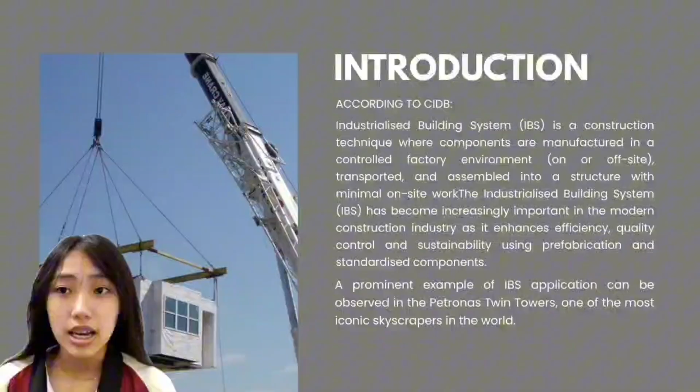Good morning. Our group today will present the usage of IBS technology in the construction of the Petronas Twin Towers. Industrialized building system is a construction technique where components are manufactured in a controlled factory environment. Then, they are transported and assembled into structures on site.

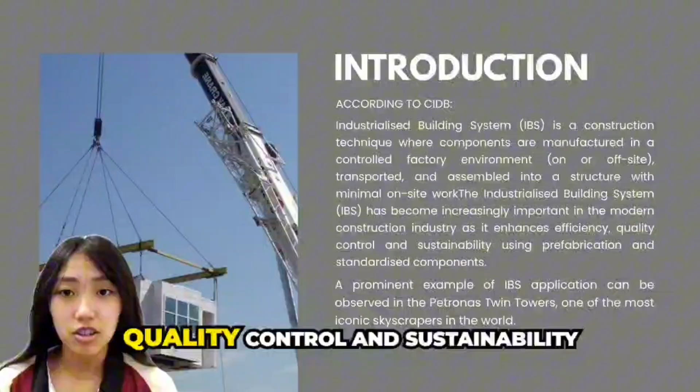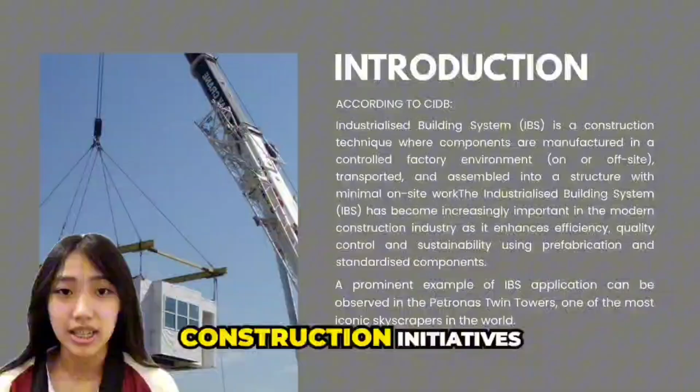Industrialized building system has become increasingly important in the modern construction industry because it improves construction efficiency, quality control, and sustainability through the use of prefabricated and standardized building components. In Malaysia, the government has continuously encouraged the implementation of IBS as part of a sustainable construction initiative to reduce construction waste, shorten project duration, and improve site safety.

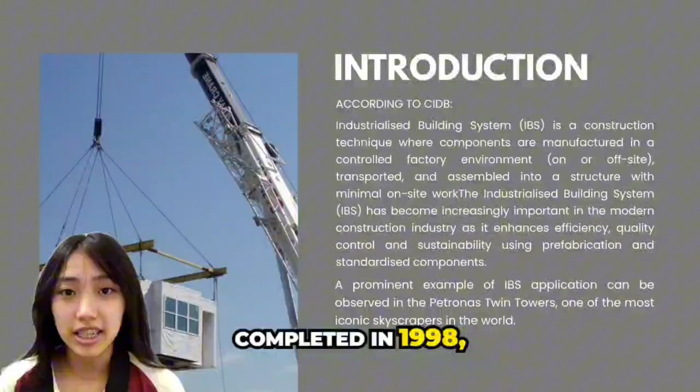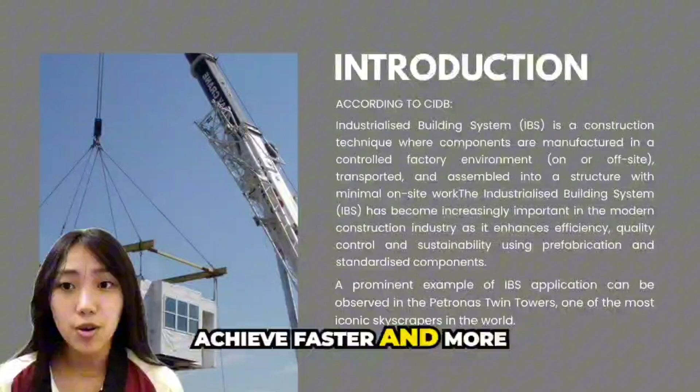One of the best examples of IBS application can be seen in the Petronas Twin Towers. Completed in 1998, the towers demonstrate advanced construction techniques and innovative engineering solutions. The project utilized high-strength reinforced concrete together with a systematic construction process to achieve faster and more efficient construction. The use of IBS in this mega project also helped improve productivity, construction quality, and overall project management.

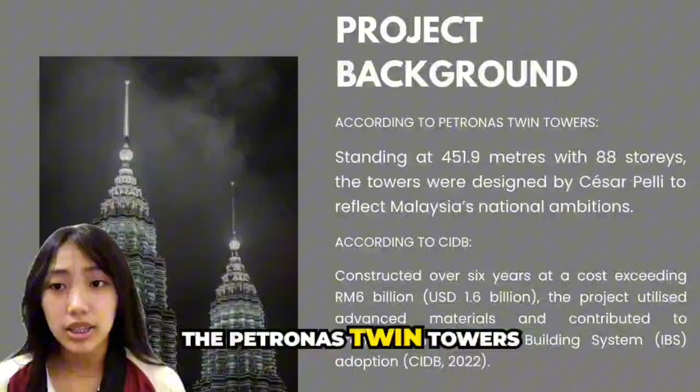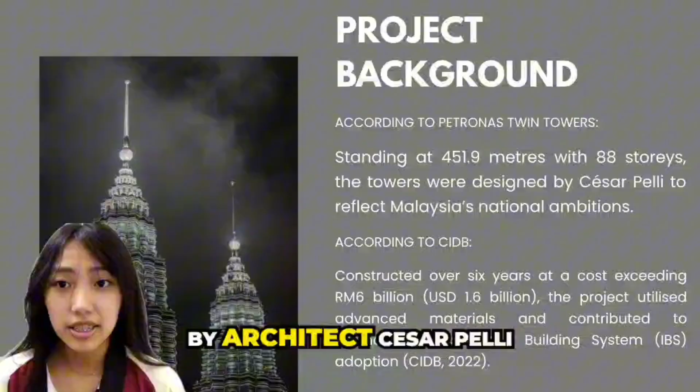Moving on to the project background, the Petronas Twin Towers are among the best and most iconic architectural landmarks in the world. Standing at 451.9 meters with 88 stories, the towers were designed by architect Cesar Pelli to reflect Malaysia's national ambitions and modern development. From 1998 until 2003, they were recognized as the tallest building in the world.

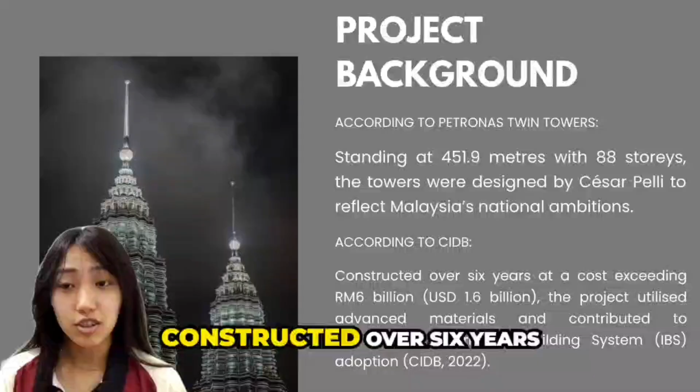In addition, the towers symbolize Malaysia's Vision 2020 and represent the nation's economic growth and global image. Constructed over 6 years at a cost exceeding RM 6 billion, the project became an important benchmark for the successful implementation of IBS technology in large-scale construction projects in Malaysia.

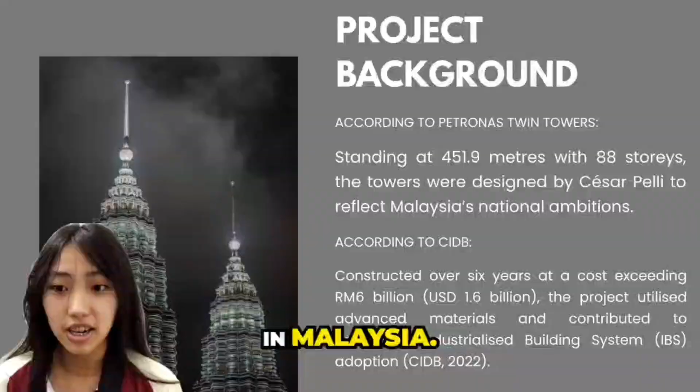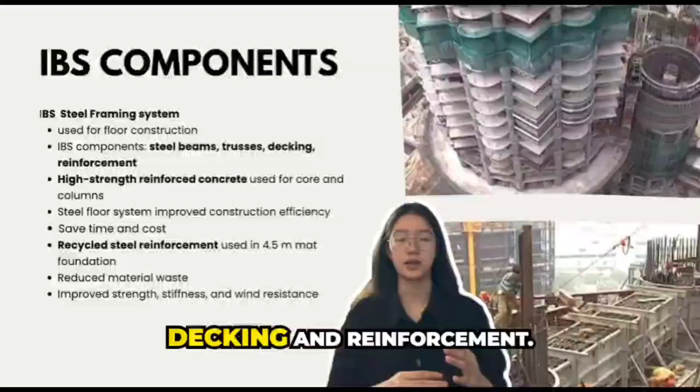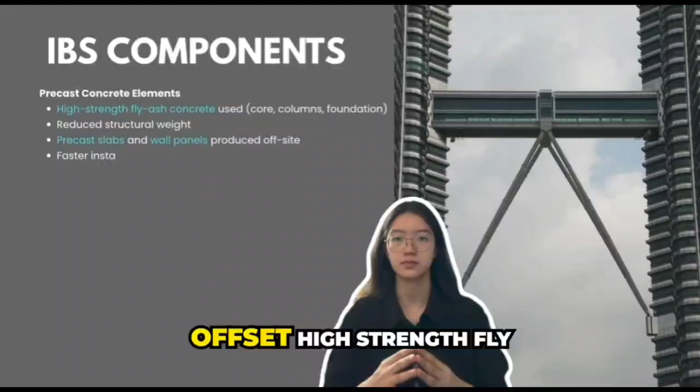The IBS components used in the construction of the Petronas Twin Towers. First, the project applied a steel framing system for floor construction using IBS components like steel beams, trusses, decking, and reinforcement. High-strength reinforced concrete was used for the core and columns to improve structural strength and efficiency. Next, precast concrete elements such as slabs and wall panels were produced off-site. High-strength fly ash concrete was also used to reduce structural weight, labour, and construction time while improving sustainability.

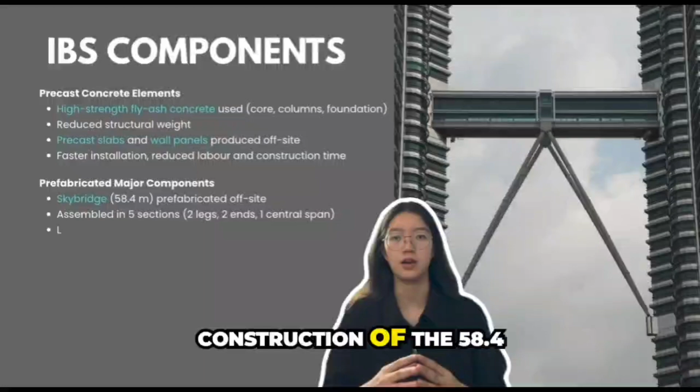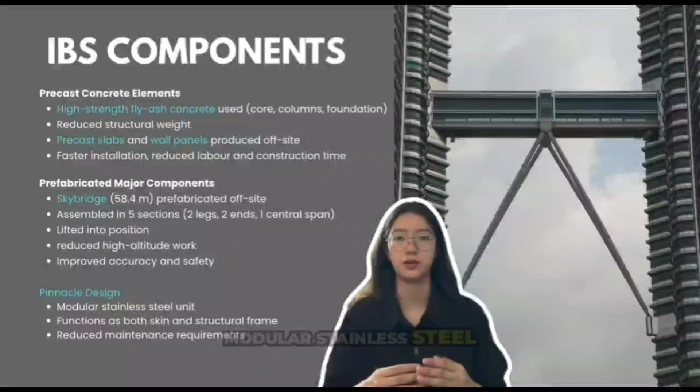In addition, prefabricated major components were implemented in the construction of the 58.4-meter sky bridge. The sky bridge was assembled in 5 sections and lifted into position, which improved safety, accuracy, and reduced high-altitude work. Lastly, the pinnacle design used modular stainless steel units that function as both the exterior skin and structural frame. This reduced maintenance requirements and improved durability. Overall, IBS technology helps improve construction speed, cost efficiency, and structural performance.

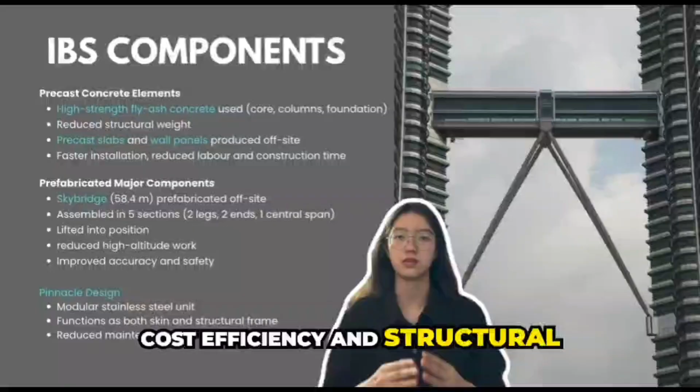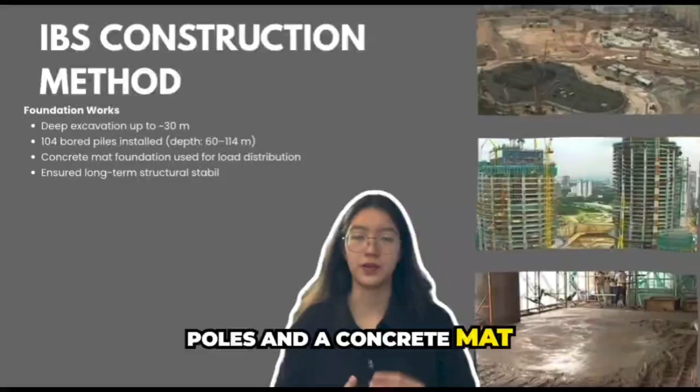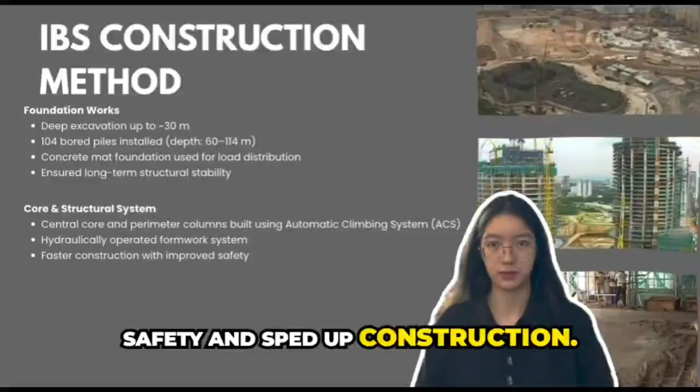Furthermore, I will explain the IBS construction method used in the Petronas Twin Towers. First, the foundation works involve deep excavation of about 30 meters with 104 bored piles and a concrete mat foundation to ensure long-term structural stability. Next, the core and structural systems use the automatic climbing system, which is a hydraulically operated formwork that improves safety and speeds up construction. For floor construction, prefabricated steel beams and metal decking were installed floor by floor, reducing temporary supports and accelerating progress.

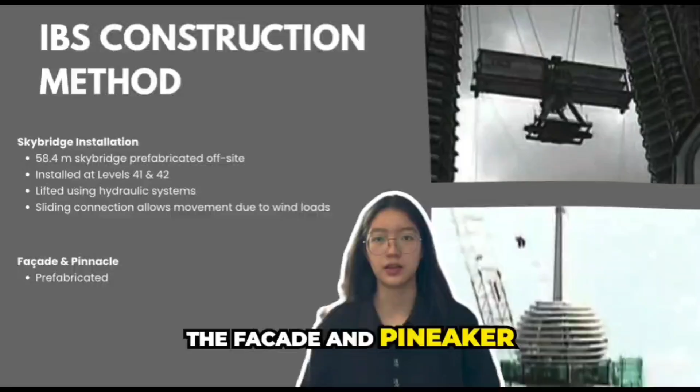The sky bridge installation involved a 58.4-meter bridge prefabricated off-site in South Korea, then lifted to level 41 and 42 using hydraulic systems. Its sliding connection allowed movement during strong winds. Lastly, the facade and pinnacle use prefabricated curtain wall systems and modular pinnacles, improving durability while reducing maintenance. Overall, IBS made construction faster, safer, and more efficient.

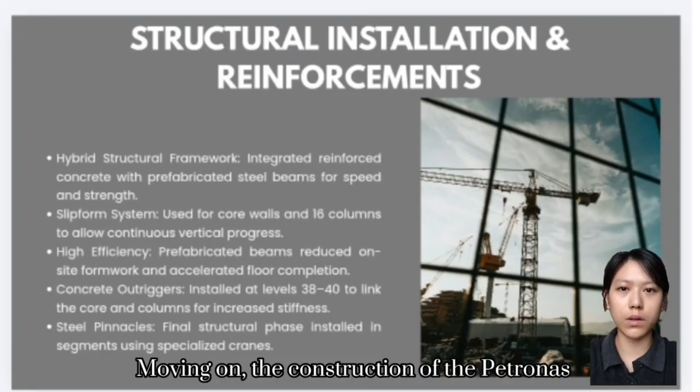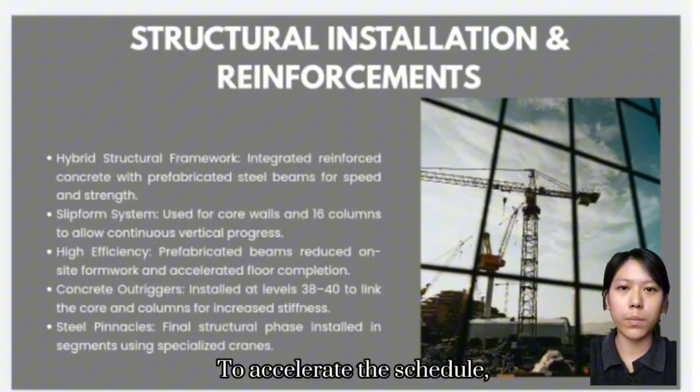Moving on, the construction of the Petronas Twin Towers utilized a hybrid structural system that integrated high-strength reinforced concrete with prefabricated steelwork. A slip-form system was implemented for the central core and 16 perimeter columns, which allowed for continuous vertical progress and high structural stability. To accelerate the schedule, prefabricated steel beams were used for the floor system, significantly reducing the need for on-site formwork.

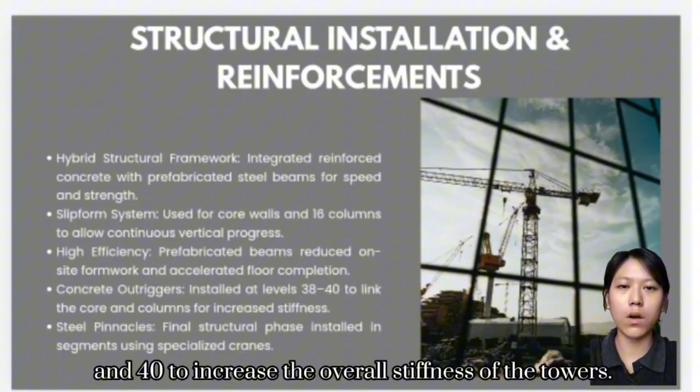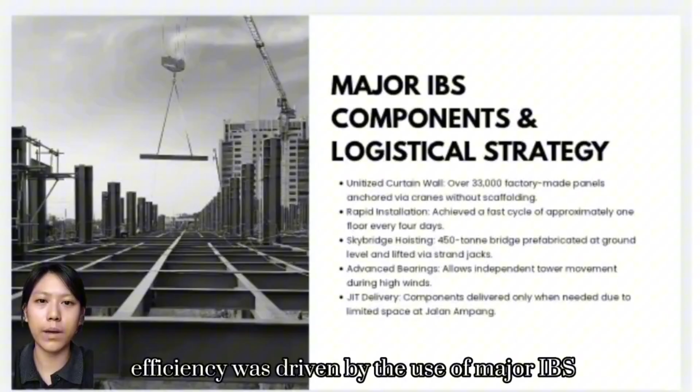For lateral stability, concrete outriggers were installed between levels 38 and 40 to increase the overall stiffness of the towers. The process concluded with the installation of the steel pinnacles, which were hoisted in segments using a specialized crane. Next, the project efficiency was driven by the use of major IBS components, such as the unitized curtain wall system.

Over 33,000 factory-made panels were anchored directly to the floor slab via cranes, eliminating the need for external scaffolding and achieving an installation rate of 1 floor every 4 days.

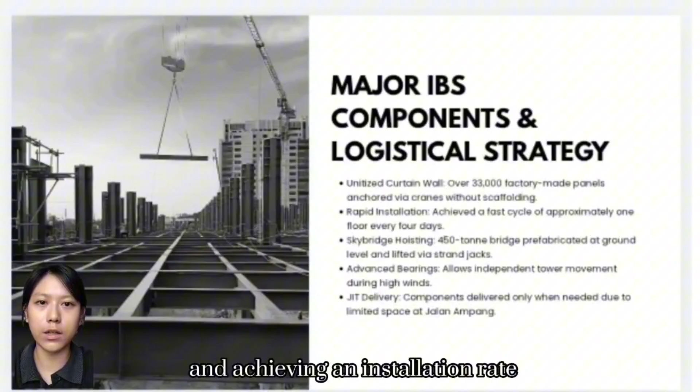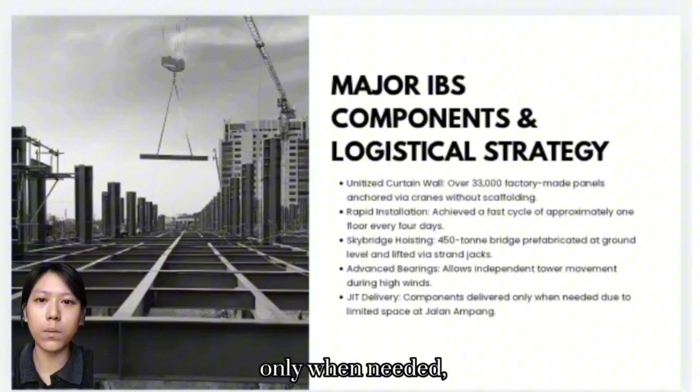Another major achievement was the skybridge installation. The 450-ton structure was prefabricated at ground level to minimize high-altitude risk and then lifted into position using a hydraulic strand jack system. In terms of logistics, the limited space at the Jalan Ampang site required a just-in-time delivery strategy. This ensured that prefabricated components were delivered only when needed, maintaining a continuous construction workflow despite the site constraints.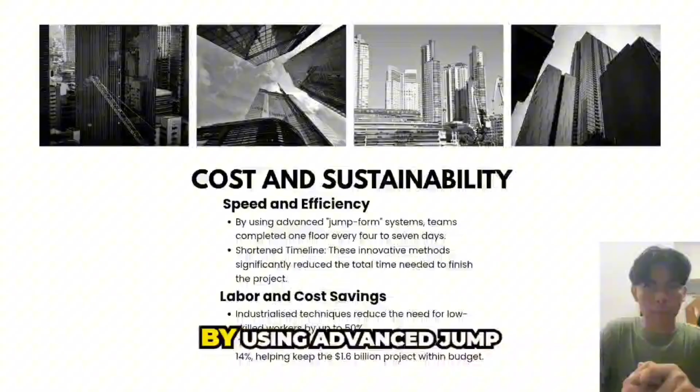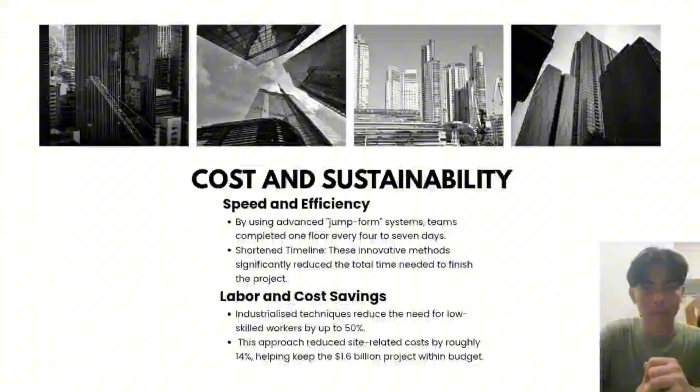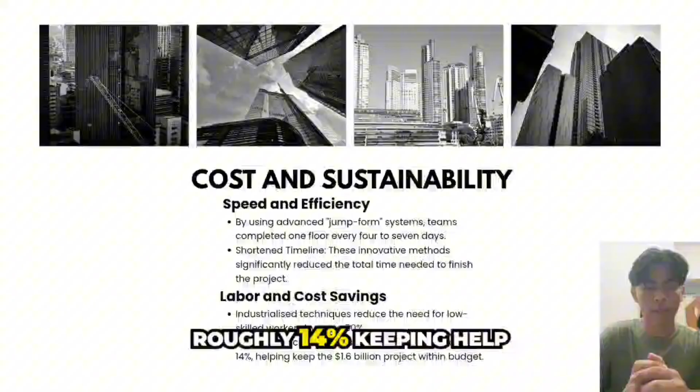I will be presenting the cost and sustainability of using IBS. Firstly, speed and efficiency. By using an advanced jump form system, the team can complete one floor every 4 to 7 days. And these innovative methods significantly reduce the total time needed to finish the project. Secondly, labor and cost saving. Industrialized techniques reduce the need for low-skilled workers by up to 50%. This approach reduced site-related costs by roughly 14%, helping keep the 1.6 billion project within budget.

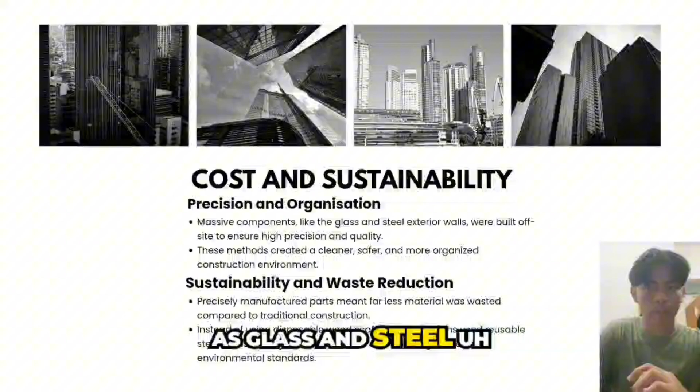Thirdly, precision and organization. Massive components such as glass and steel curtain walls were built off-site to ensure high precision and quality. This method created a cleaner, safer, and more organized construction environment.

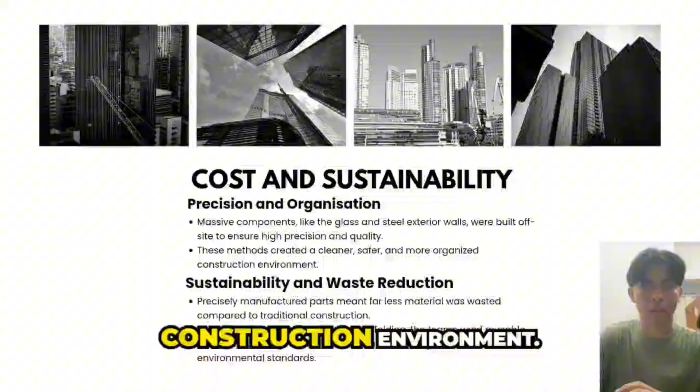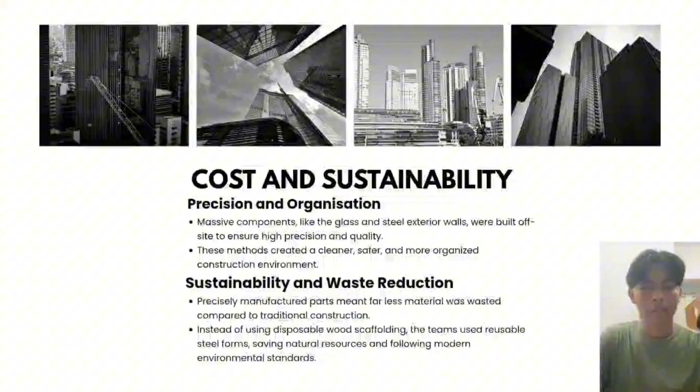And lastly, sustainability and waste reduction. Precisely manufactured parts meant far less material was wasted compared to traditional construction. Instead of using disposable wood scaffolding, the team used reusable items, steel forms, saving natural resources and following modern environmental standards.

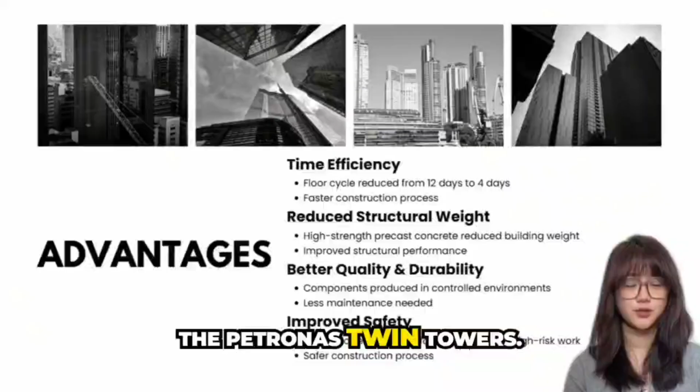Next, I'll explain the advantages and challenges of using the Industrialized Building System or IBS in the construction of the Petronas Twin Towers. Firstly, one of the main advantages is time efficiency. The use of about 4,000 tons of structural decking reduced the floor cycle time from 12 days to only 4 days. This shows that IBS can significantly speed up the construction process.

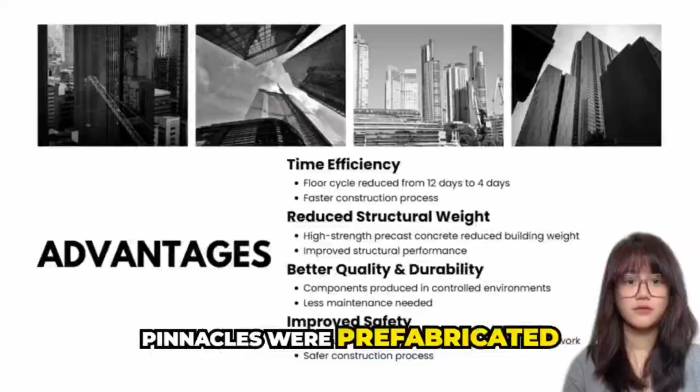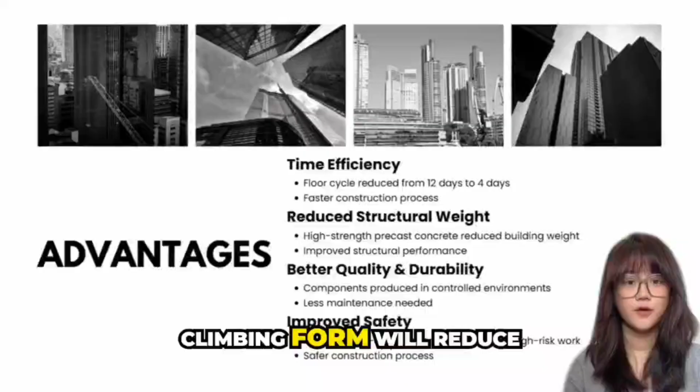Besides that, IBS also helps to improve the quality of construction. Many components such as the curtain wall system and pinnacles were prefabricated in a controlled environment. This ensures better accuracy and reduced defects compared to traditional methods. Another advantage is better safety during construction. The use of hydraulic self-climbing formwork reduces the need for workers to carry out dangerous tasks at high levels, which helps to lower the risk of accidents.

In addition, IBS reduced the need for a large number of workers on site. This not only improves site management but also reduces material waste, making the construction process more efficient and environmentally friendly. However, there are also some challenges when using IBS. One of the main challenges is high initial cost. The use of advanced technology and specialized equipment requires a large amount of investment at the beginning.

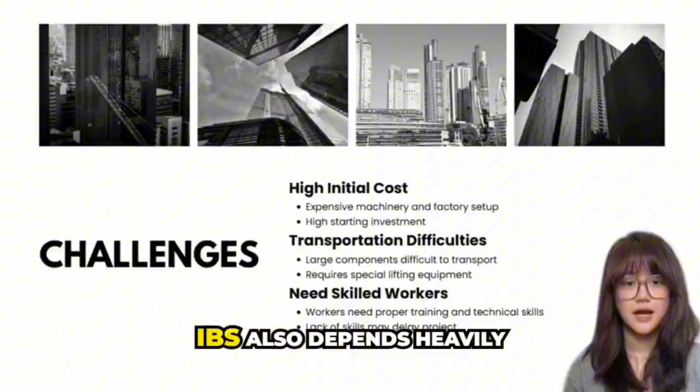Another challenge is related to transportation and logistics. Large components like the sky bridge are difficult to transport and install, and this requires careful planning and heavy machinery. IBS also depends heavily on skilled workers. If there is a lack of experience or technical knowledge, it may cause delays in the project. Lastly, due to the unique design of the Petronas Twin Towers, many components could not be standardized. This increased the cost and makes the process less flexible.

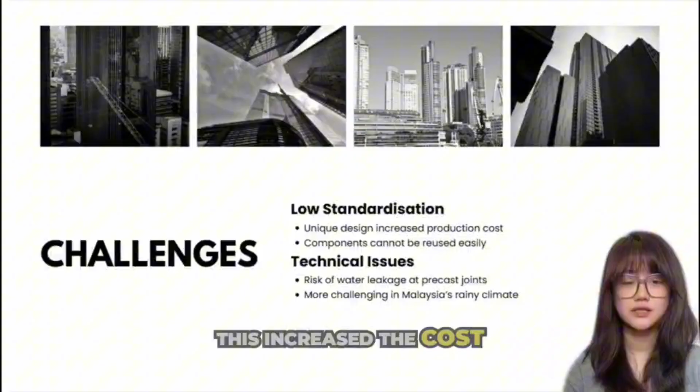Overall, IBS provides many benefits in terms of speed, quality, and safety, but it also requires proper planning, cost control, and skilled workers to be successfully implemented. In conclusion, the construction of the Petronas Twin Towers clearly demonstrates how effective the Industrialized Building System, or IBS, can be in large-scale construction projects.

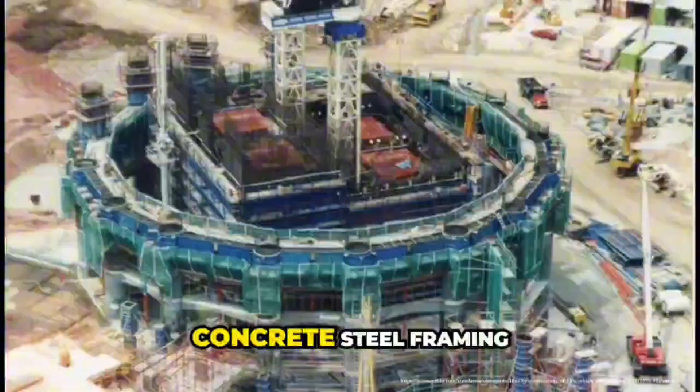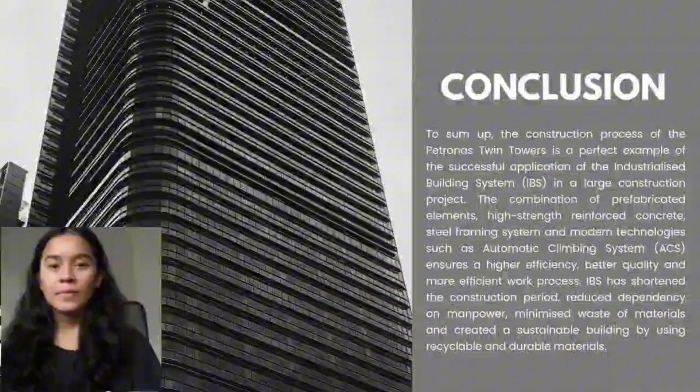Through the use of prefabricated components, high-strength reinforced concrete, steel framing systems, and advanced technologies such as the automatic climbing system, the project achieved higher efficiency, improved quality, and a smoother construction process. In addition, IBS helped to shorten the construction period, reduce dependency on manpower, minimize material wastage, and promote sustainability through the use of durable and recyclable materials.

Although there were several challenges, including high costs, transportation difficulties, and the need for skilled labor, the overall benefits of IBS were much greater than its disadvantages. Today, the Petronas Twin Towers stand not only as an iconic landmark of Malaysia, but also as an important benchmark for future IBS application in the country. Overall, IBS technology has proven to be highly effective and beneficial in modern construction projects.